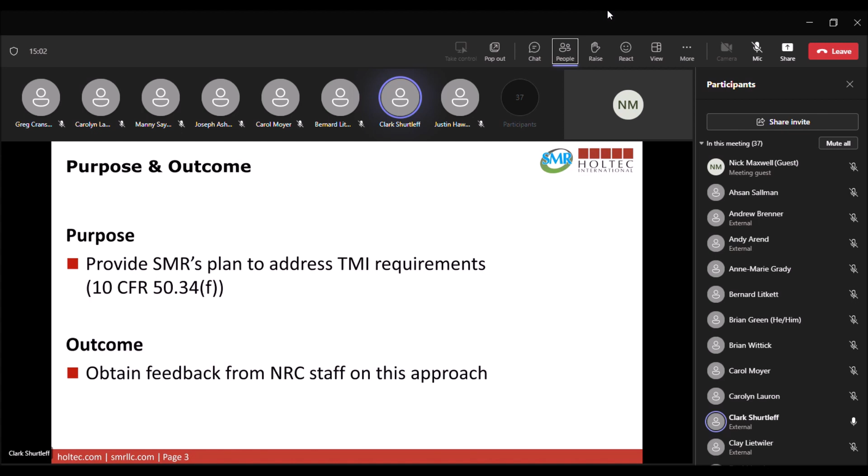The purpose of this meeting is to talk about the TMI requirements contained in 10 CFR 50.34F and to get NRC feedback. The format that most of our slides are in here kind of reflects our planned conformance table in the SAR. We've got the requirement item number on the left, an abridged version of the requirement, then our position on conformance, whether we intend to conform, believe the requirement is not applicable, or are planning to request an exemption, and then the justification on the right.

You'll see on some of the slides we've got either a note, a comment, or a question that we don't intend to include in the final table. The information on the main portion of the slide is what we intend to include in the eventual table. These notes and comments and questions are just for our discussion today.

I won't be going through perfectly in order. Some of the items that we think are just not applicable to us, I've moved down to the end of the presentation. If we end up running out of time and don't get to address all of those, I see them as slightly lower priority because we view them as not really applicable to our design.

For items where we think we're going to conform, or where they're very evidently not applicable, I intend to move through those pretty quickly. If the NRC has a particular comment on any of those that I zip through, feel free to just raise a hand or shout out, and we can go back to that particular requirement.

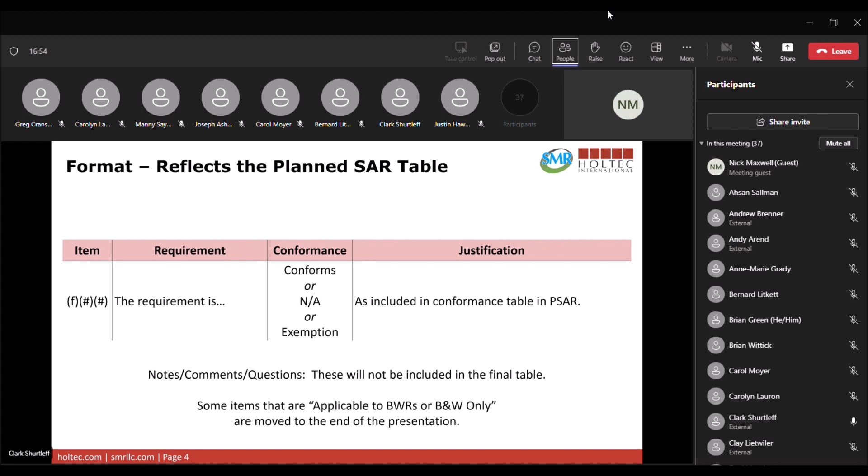All right, any questions on that? Okay, hearing none. A first question before we dive into the actual requirements.

So for the sake of brevity, our intention is to provide a very brief discussion of whether we conform, how we conform, and for not applicable items and exemptions, expect that the detail would be provided elsewhere. For the NRC, does the NRC expect to see a reference to the section where that detail is located in every single case, or are there some cases where a specific reference to any or the several locations where that information might be residing in the PSAR? How much of those references do you expect to see in the final document?

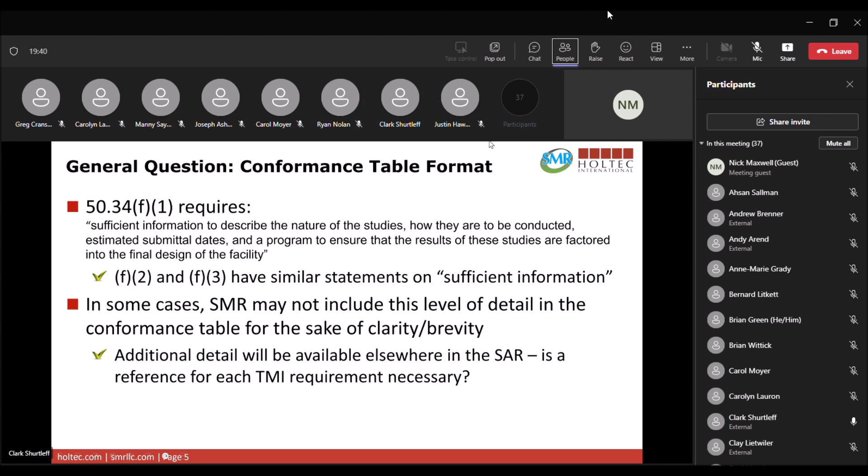All right, so we'll get into the requirements now. The first one is pretty straightforward, supposed to perform a plant site-specific PRA. We are developing that, and we're going to be submitting that as part of the OLA.

The next one, there are a variety of... oh sorry. Yep, it looks like we've got a question. Yes, please. This is Marie Pohida with the PRA staff.

When you look at 5034 F1I, it says perform a PRA to seek improvements in design of the core and containment heat removal that are significant and practical. So it's just more than performing the PRA. It's once the design has been identified, to seek if you can improve that, if there's any cost-beneficial safety enhancements that are significant and practical. So it's just more than submitting and doing the PRA.

Yeah, I think that's a fair comment, and maybe our justification here isn't explicit enough to really talk about that. But when we talk about integrating into the design process, we are specifically intending to mean that we are using some of those findings from the PRA that have led to improvements in our design itself. And so maybe that's just where the misunderstanding is.

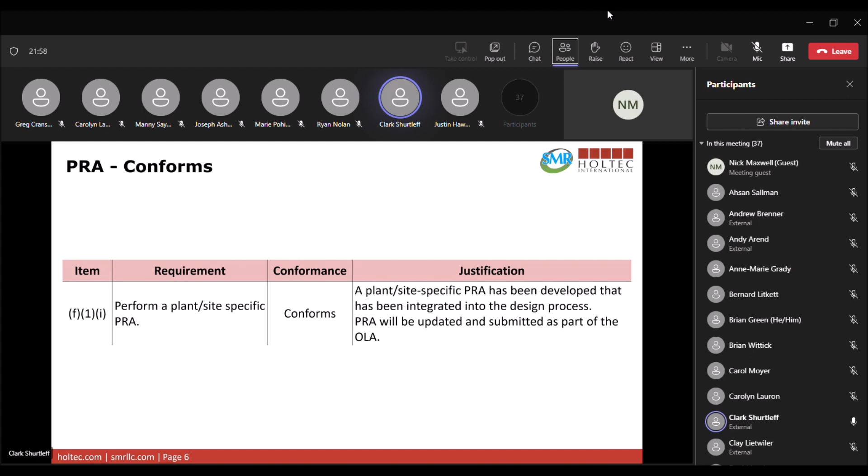Okay, so the next one we're talking about aux feedwater systems. There are a variety of requirements associated with the aux feedwater systems. Our design does not include an aux feedwater system, but we do have a system that serves a similar decay heat removal function. And so our expectation is not to include much of any discussion of the other systems that have similar DHR functions, because the language of this requirement points to the aux feedwater system, which we don't have.

Go ahead, John. No, you go first. Okay, I was just going to ask about this topic. This is John Lehning from the staff here, and there are a couple items where I think this similar question might come up, where there's a different system. Not only the name's different, but a lot of the components are different, but the similar function is served here. And when I look at the requirement, I suspect that a lot of the things have been done, like the reliability analysis, design review.

You probably have done those things, and I'm not the legal authority here to say whether this could be actually called a not applicable one, or if it's legitimate for the NRC to expect that you treat this system that does a similar function according to that requirement. But I think it's something to consider whether it might make sense to include some of that. Especially this one, you've probably already done similar things for that system.

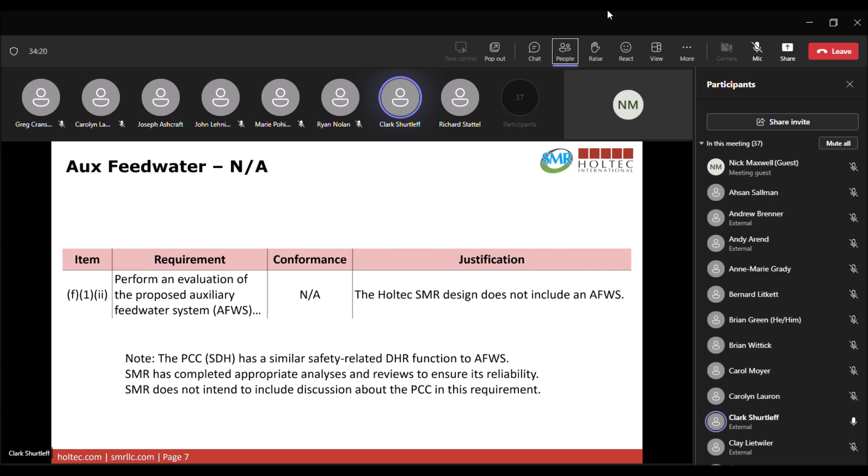Okay, so this next one is about RCP seal damage. We are still working on finalizing our RCP design, and so we are not sure exactly whether we are going to choose a sealless design or one that includes a seal. I guess our question for you is, in the event that a sealless design is selected, would we be considering this not applicable or pursue an exemption?

I'm not sure. This is John Lehning. I'm not sure who on the staff might be the best person to speak to that. And I think, like Ryan said, maybe we don't want to give too definitive feedback. But one way of looking at that is if there's no seal, there's no possibility of damage. And it's almost, to me, as if you could argue that you might be able to have evaluated and found that because you don't have the seal, there's no possibility of damage. I don't know what that final position might look like from the staff. I don't know if you've considered something like that. Okay.

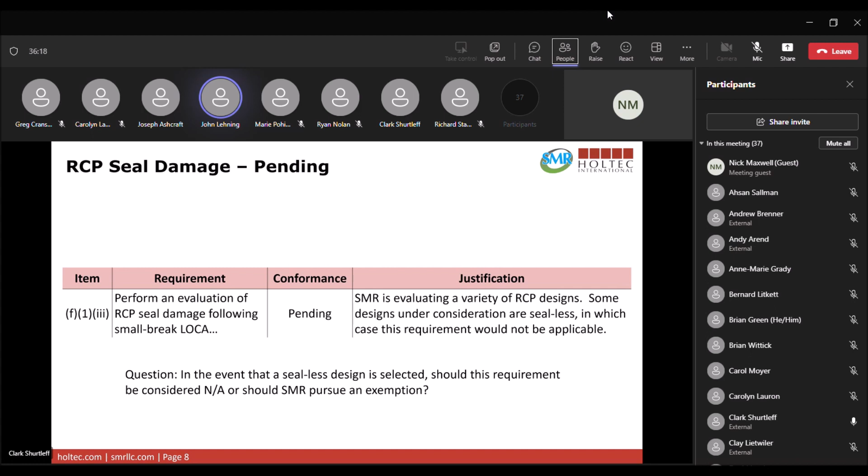Yeah, I guess what you're saying, John, is that perhaps depending on how we would approach that, we could choose conforming because of not having a seal and we've done that evaluation, or we can say potentially not applicable because there is no possibility for seal damage. I guess really all you're saying is there's a couple different ways we can approach this that potentially would be acceptable to the staff. And it sounds like you guys have done some homework, and I know there have been other designs out there without seals or with canned-type motors, so they might have blazed that trail a bit already too. Okay, very good.

All right, so this is about stuck open power-operated relief valves. In this case, we do not include power-operated relief valves in the reactor coolant system. We do have safety valves for overpressure protection, and we do have automatic depressurization valves, which are power operated but are intended to remain open after an initial operation. They're not intended to close afterwards. We weren't intending to provide a great deal of discussion of those valves in this portion, but we will be analyzing unintended actuation of the ADS. So we will be, elsewhere in the PSAR, addressing the possibility of unintended actuation of the depressurization system.

Just a question on that one, John Lehning, again from the staff. Have you looked at the idea of a stuck open safety valve as a part of this too? I think in the original designs here that this requirement was going toward the PORVs might have been limiting to safety valve stuck open. And is that something you've thought through or have looked at precedent on? I guess I'll have to kick that question to Clay. Clay, do you know if that's one that we've evaluated?

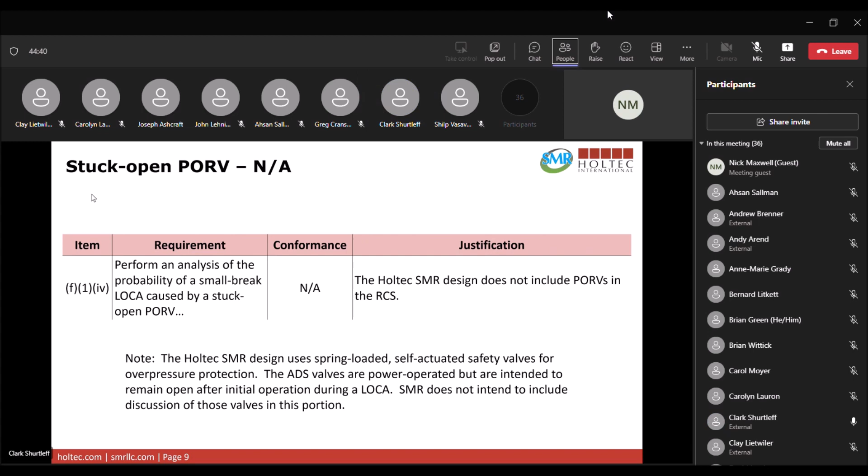All right. This next one is a requirement that was listed as applicable to BWRs only, talking about the automatic depressurization system. Our design includes an ADS system similar to that used by BWRs. We intend to list this as not applicable. Again, we're asking whether it should be listed as conforms, given that we have a similar system, and we either have or intend to perform this risk assessment study.

So it sounds like from the conversation so far that the NRC staff are not going to comment on whether we should list this as not applicable or conforms. Well, this is Ryan. I know you looked at multiple new reactor applications for precedent, and there's been a lot of mentioning of NuScale, but I would go back and look at what AP1000 put here as well, because I don't believe they tried to argue that it wasn't applicable to them. I think they provide some explanation: yes, we have an ADS, and then point to where the information on that system is provided.

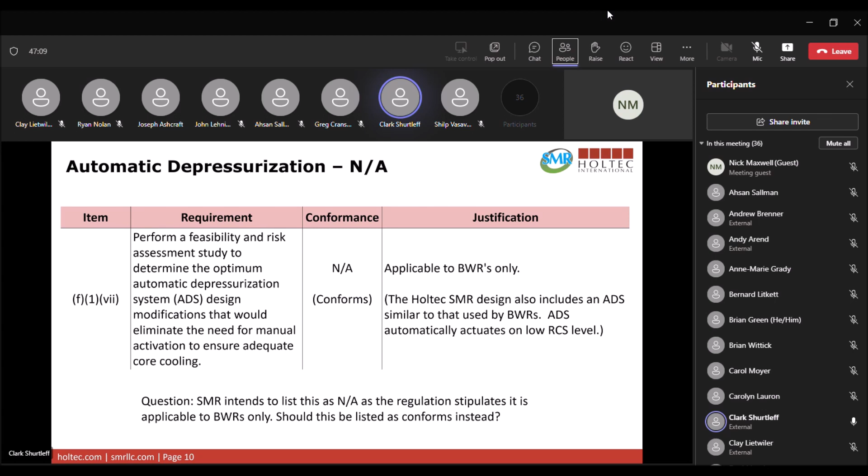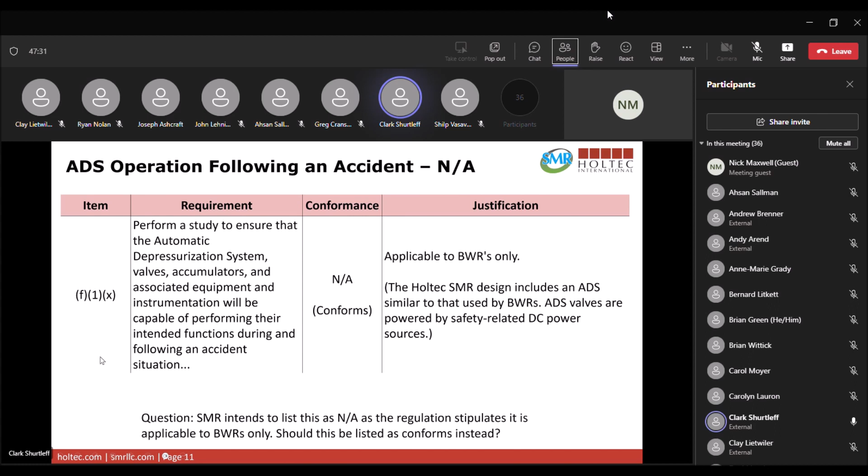For this one in particular, it is not very easy to understand what the intent of the requirement is, and that's why we chose to list two potential outcomes here. I understand the comments you've made so far, and I'm just trying to elaborate a little bit more on our position. And even if we provide all of that additional information, would we be conforming or would it be not applicable? It's not totally clear to us, and perhaps it's immaterial if we provide that information. So, all right, step into the next one.

Simulator capability. This one's pretty straightforward. We're expected to provide capability. We are developing that capability. Any questions there? No questions on that. Something I will say about this requirement, and this is Jesse Seymour from the Human Factors and Operator Licensing Branch: this is a requirement that our Part 50 and 52 lessons learned rulemaking has specifically called out as duplicative of the requirements you'd otherwise find in Part 55, specifically items under 55.46.

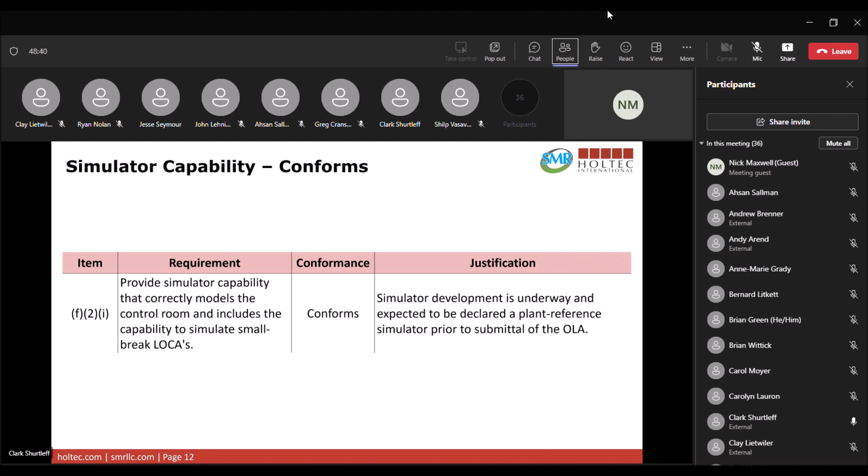So just from an efficiency standpoint, we've self-identified that this is a duplicative requirement. Again, I appreciate noting it here. If you meet the Part 55 requirements for a simulator, you should inherently be covering those. So just know that, longer term, that is something we've sent to the commission as a proposal to correct this duplication. Okay, understood.

The next one is about continuous improvement, establishing a program to ensure that we're continuing to improve our plant procedures. We have a continuous improvement program in place, so we conform with this one.

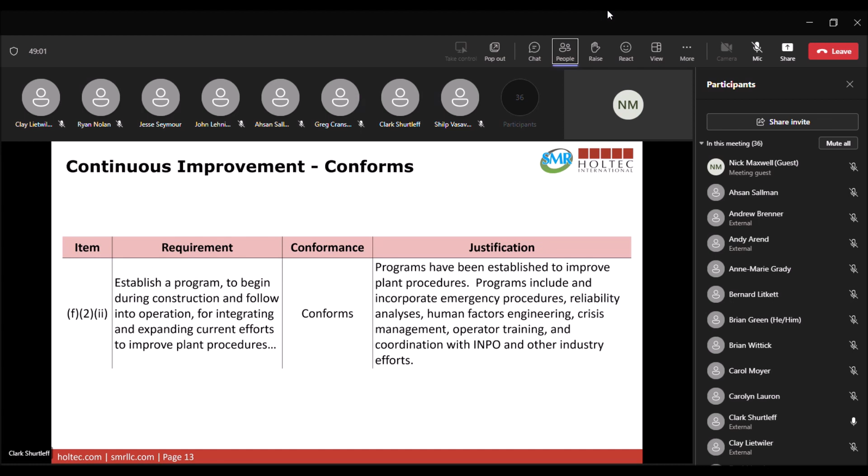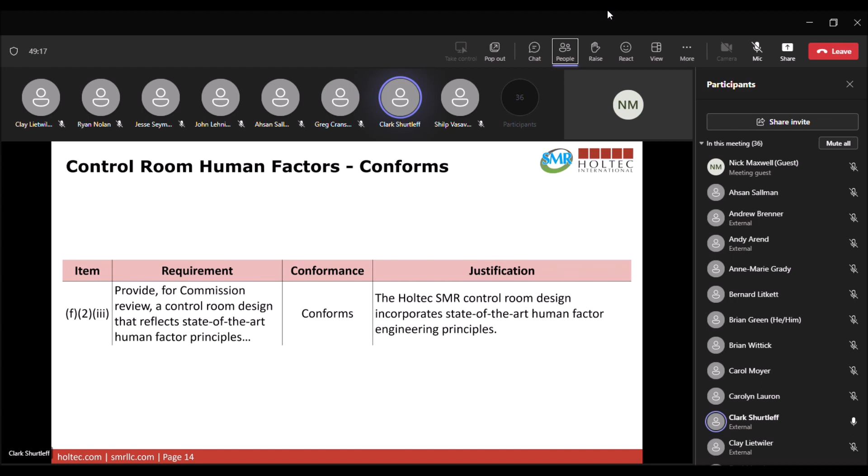All right, this is about control room design and human factor principles. We are incorporating human factor engineering principles into our design, so we conform here. Another item about control room design, it asks for a plant safety parameters display. We include those parameters on our VDUs.

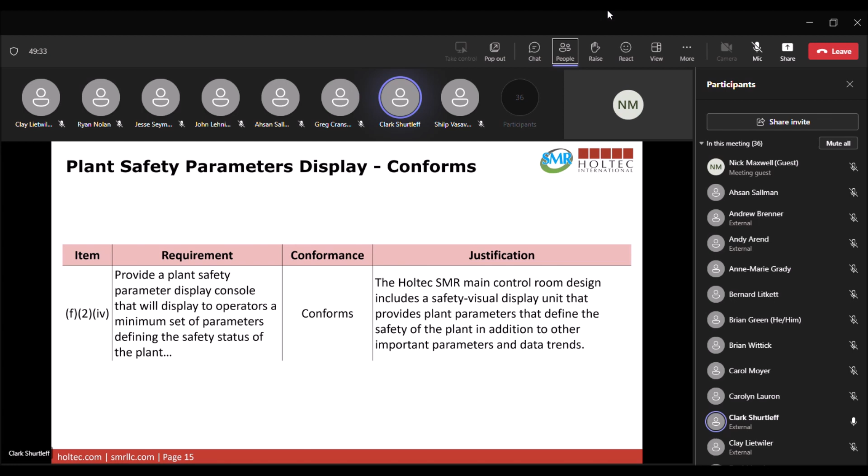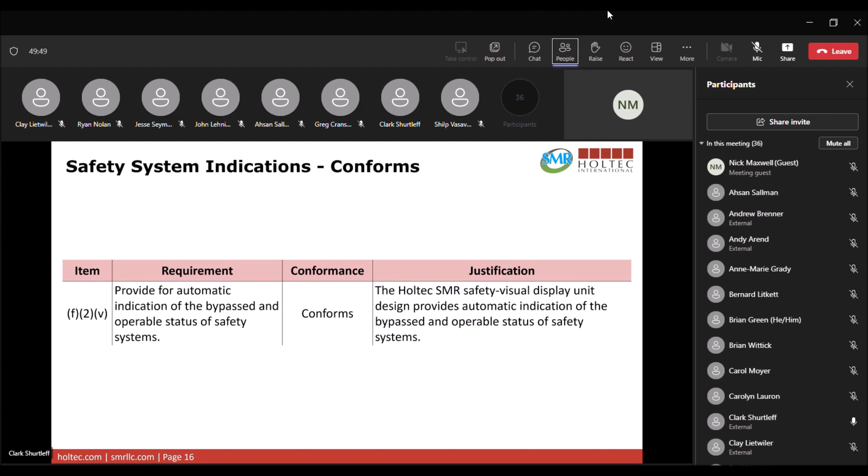This one's talking about safety system indications. On our VDUs, we include the status of safety systems, so we conform here. Okay, this is about high point venting. So the requirement is to provide the capability of high point venting from the RCS.

We do include high point vents that are used during refueling outages, but they are not safety related. The ADS system would be responsible for removing non-condensable gases in the event we had challenges to long-term cooling. Again, we intend to state that our design conforms with the requirement because we do have the capability to remove non-condensable gases from the RCS and to ensure continuous core cooling. But it is not the traditional high point vents that serve that purpose.

One question or comment on that, I guess, with some of the redesign that might be going on with the design, whether the ADS can remove non-condensables from every high point that might be in the system might still be a remaining question, at least from our perspective. And so I guess that would all remain to be seen whether it can serve that function. Obviously, the non-safety ones, or maybe those that are for outage operation, may not necessarily serve that purpose.

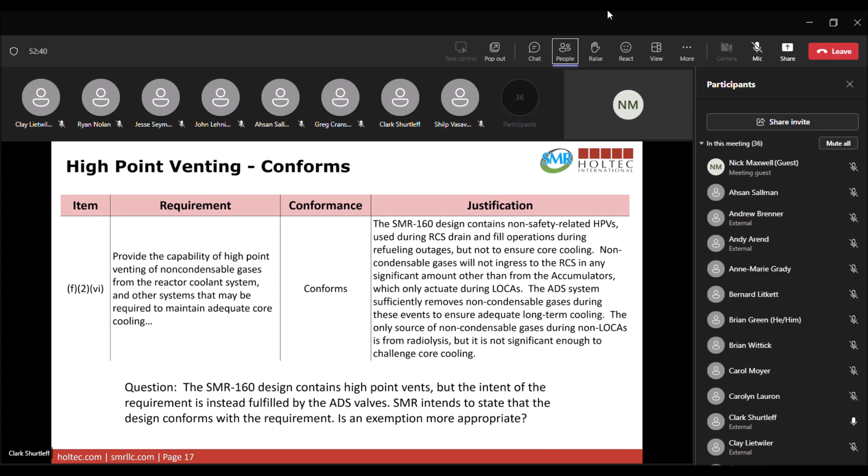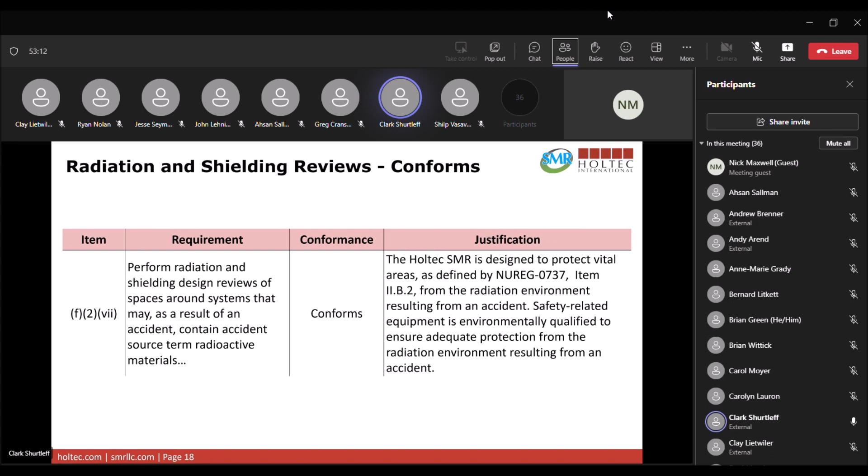The next item is about radiation and shielding reviews. The requirement here is to make sure that radiation from an accident doesn't prevent access to essential spaces or operation of essential equipment during an accident. Our design is set up to protect vital areas and to ensure that safety-related equipment will continue to operate, so we conform there.

The next requirement is about post-accident sampling, the PASS system. We understand there's a bunch of history there, and we intend to pursue an exemption. We recognize that one portion of the requirement is to sample hydrogen in the containment atmosphere, but there are several other requirements in addition to this one that require sampling of hydrogen in the containment atmosphere in an accident scenario. So we're evaluating those separately. Okay.

This next requirement, or a couple of requirements, are about hydrogen control systems. Our design includes passive autocatalytic recombiners to accommodate a 100% fuel-clad metal-water reaction. So we expect to conform here. I guess, again, on performing an evaluation of alternative hydrogen control systems, I'm not sure exactly how much detail is expected. I know I didn't include this in our questions ahead of time. Does staff have any specific thoughts on what level of detail is appropriate for discussing that evaluation of alternatives? Obviously we have evaluated several methods, but I'm wondering how much detail is appropriate there.

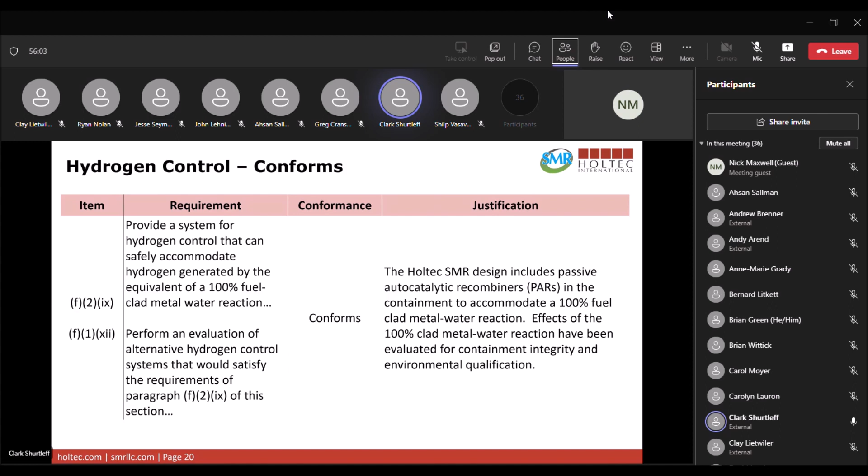The next one's about relief and safety valve testing. There are additional aspects to this requirement that I haven't listed on the slide. We conform to the majority of this requirement, except the aspects related to power operated relief valves and ATWS conditions. We don't utilize power operated relief valves, as we mentioned earlier, and we are pursuing an exemption to other requirements that require evaluation of ATWS conditions. So our intention here was to state conformance.

Sorry about that, sounds like that's the emergency alert going out to everybody. Yes, I just got the same thing myself. All right.

So again, if a member of the staff thinks that it would be more appropriate to include an exemption request here, because of the related exemption that we're pursuing, please speak up.

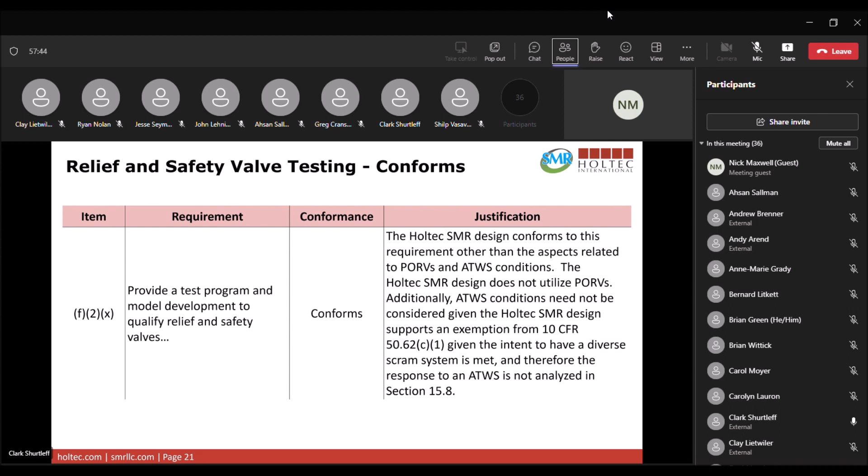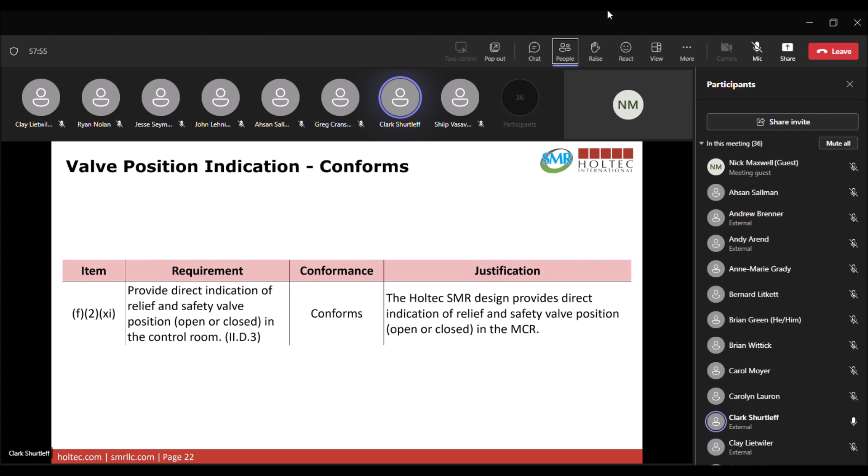Okay, hearing none. The next requirement is about safety valve position indication in the control room. We provide direct indication of these valves, so we conform there.

The next one, again, is aux feed water. I think we've discussed this one a sufficient number of times now, so we can move on from this.

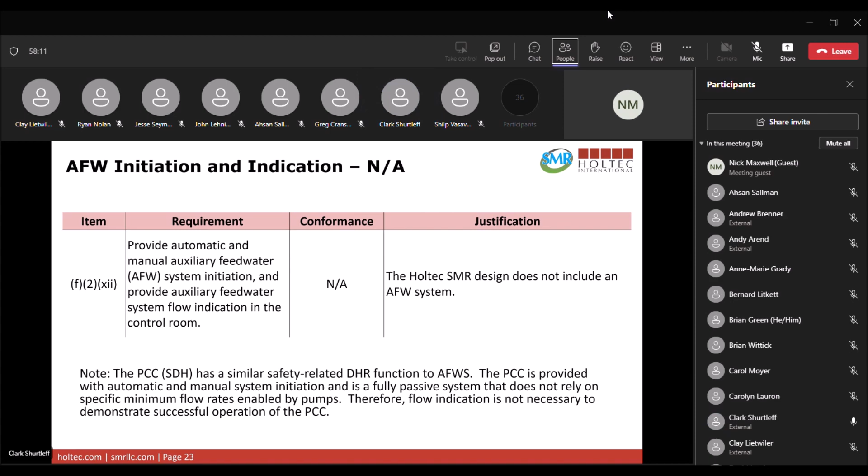So did you want to actually pursue that one, discuss that one in a little more detail? Okay.

Okay, this next item is about pressurizer heaters and natural circulation. The requirements are on the left there. So this one is still somewhat in flux as we're continuing to evaluate the results of our design, the recent design updates. We don't rely on pressurizer heaters to maintain natural circulation. In the event of a loss of offsite power, we have a couple of methods to accomplish decay heat removal.

So this is another one where we could view this as conformance or exemption. We don't use the pressurizer heaters to maintain natural circulation, but in the event of a loss of offsite power, we have alternative systems that would be capable of ensuring we maintain natural circulation and decay removal.

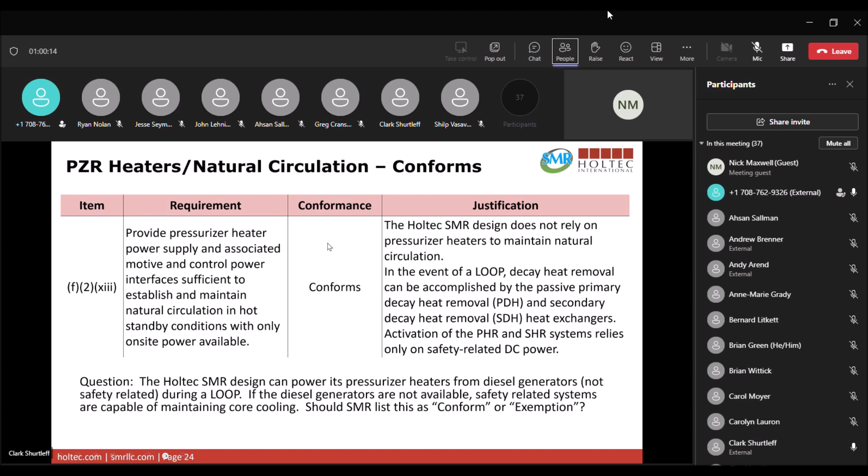So our next one is a series of requirements about containment isolation systems. I haven't listed them all here, but our design will meet all of those requirements, so we're conforming here.

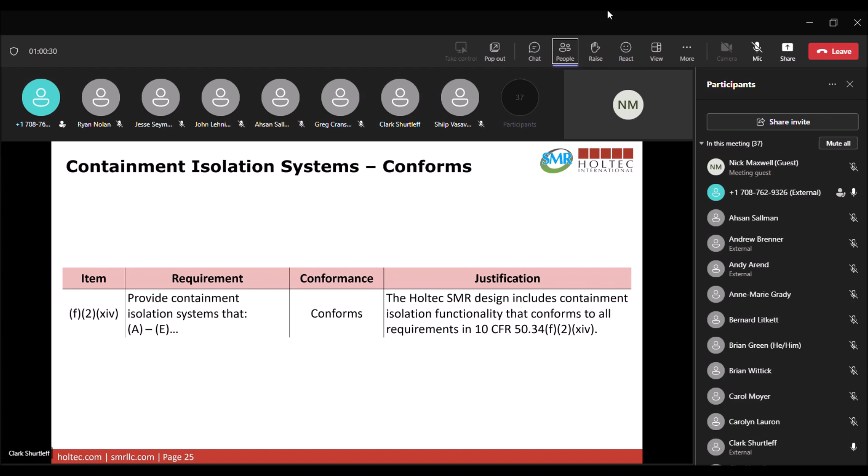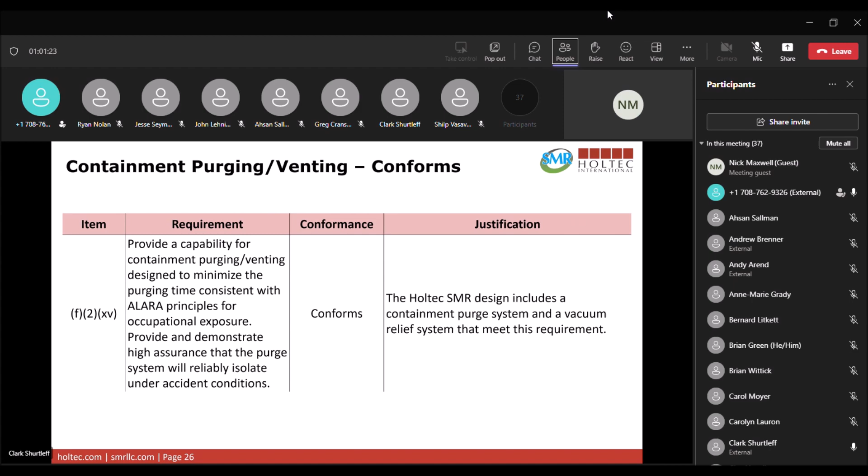Sorry, was there a comment there? Can you say what the justification for that particular exemption is, if you go that route? I don't know that I want to start expounding on that at this point. If we do pursue it, we would develop that justification and provide it at that time. Okay, fair enough. Thank you.

All right, this is Shilp. I had a question, not explicitly about what you're doing here or what you plan to do here, but more about next steps for cases where you are performing evaluations and I'm not completely sure. Is this going to be it and then we see stuff in the PSAR, or would there be pre-application engagements once you have finalized where you land on different items where you're still doing evaluations and maybe you determine you need an exemption or not?

Yeah, Shilp, I can take that one. So I think anytime that we see us potentially going into exemption space or deviation from guidance space, we definitely intend to engage the staff to make sure that, one, the level of detail and the justification that we're providing, and two, if there are any concerns or questions from the staff, we try to get ahead of that before the application is submitted itself. Our goal is not to surprise the staff in any part of our application.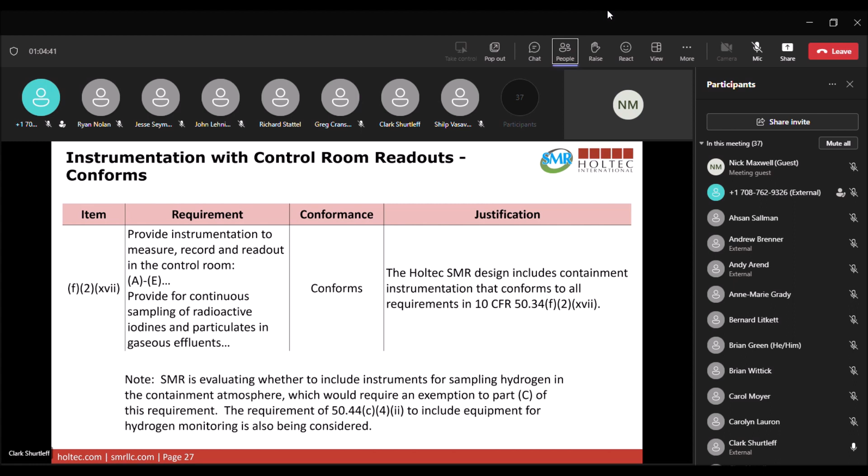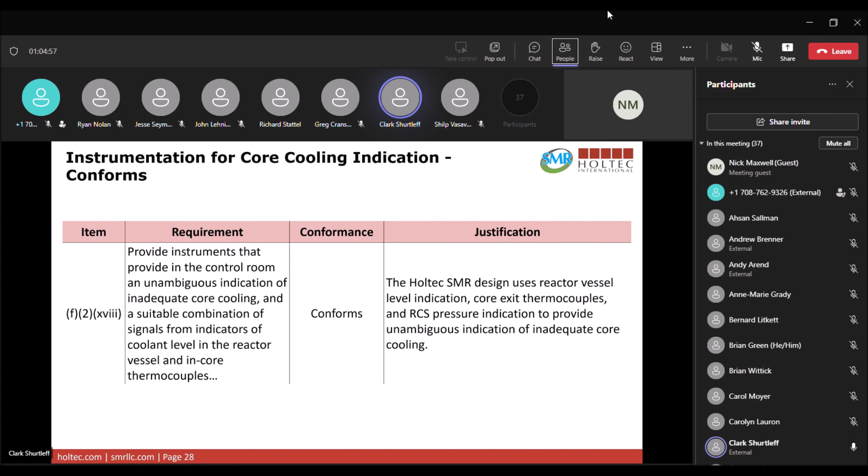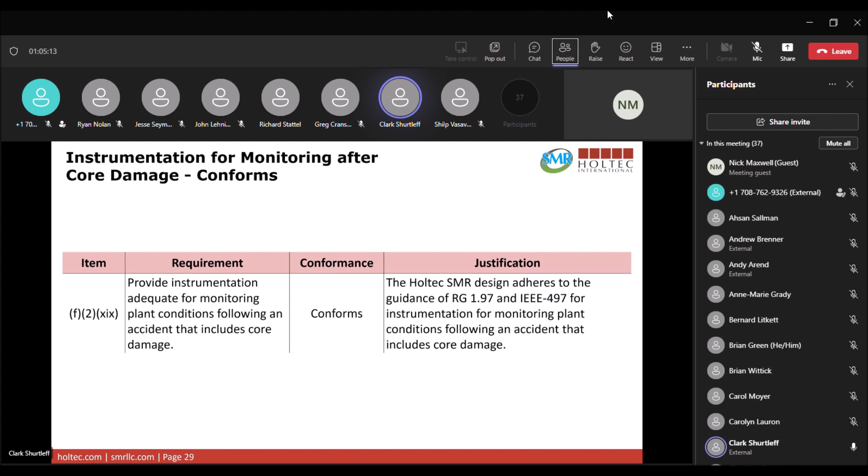The next one is instrumentation for indication of core cooling. There's a requirement to ensure unambiguous indication of inadequate core cooling. We have a variety of ways to provide that indication, so we conform there. The next requirement is about providing instrumentation adequate for monitoring plant conditions following an accident that includes core damage. We adhere to the relevant guidance, and we conform on this one.

The next requirement states that we need to have several support buildings. Our design includes those buildings, so we conform.

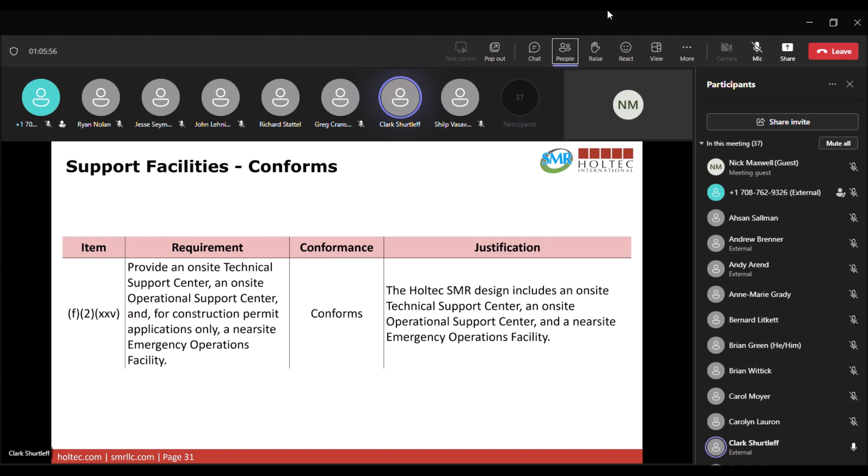There's a requirement to include leakage control and detection for systems that would contain source term radioactive materials outside of containment following an accident. Our design is such that we do not circulate or have systems in which materials containing source term radioactive materials exit the containment. So this requirement is not applicable to us.

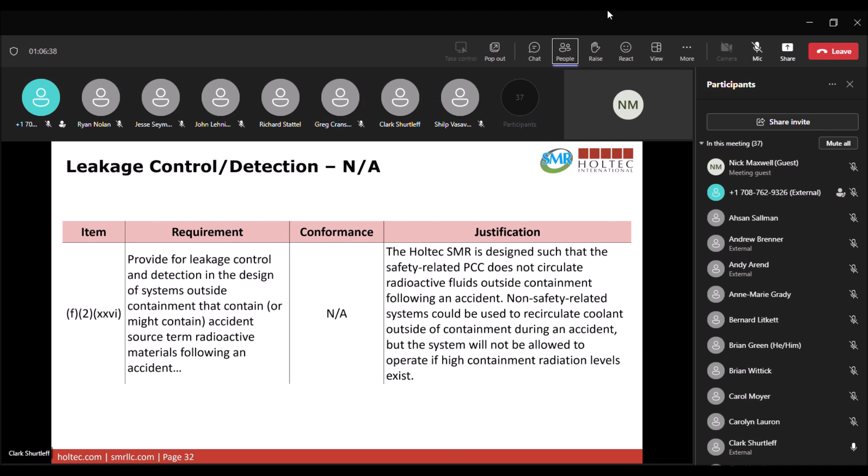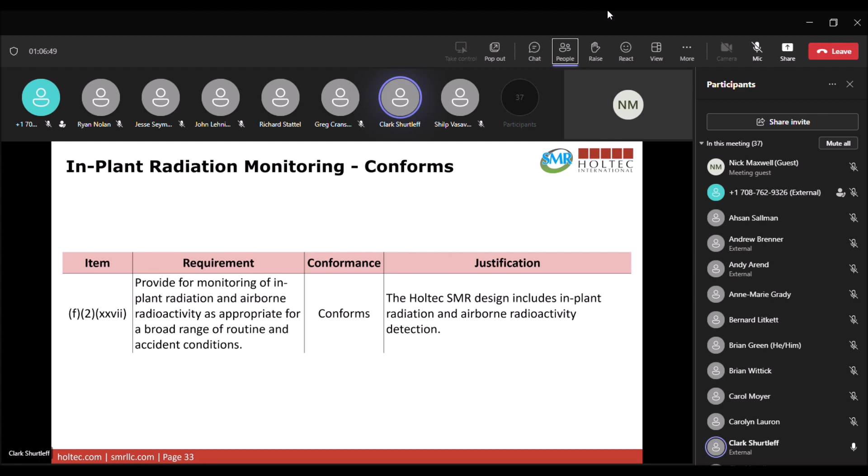This next one is about in-plant radiation monitoring. We include the required radiation monitoring, so we conform.

This next one's about control room habitability, ensuring that we have habitability in the event of accidents where radioactivity and radiation may be causing problems there. We've evaluated the potential impacts of that, and our control room is designed to preclude habitability issues.

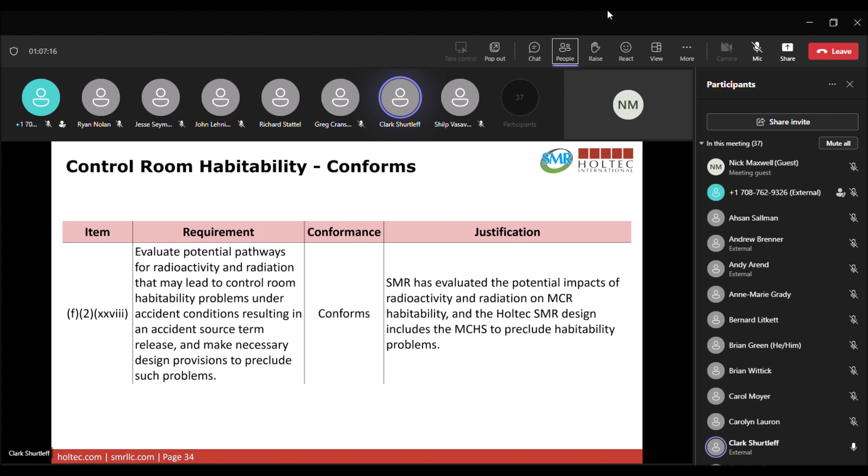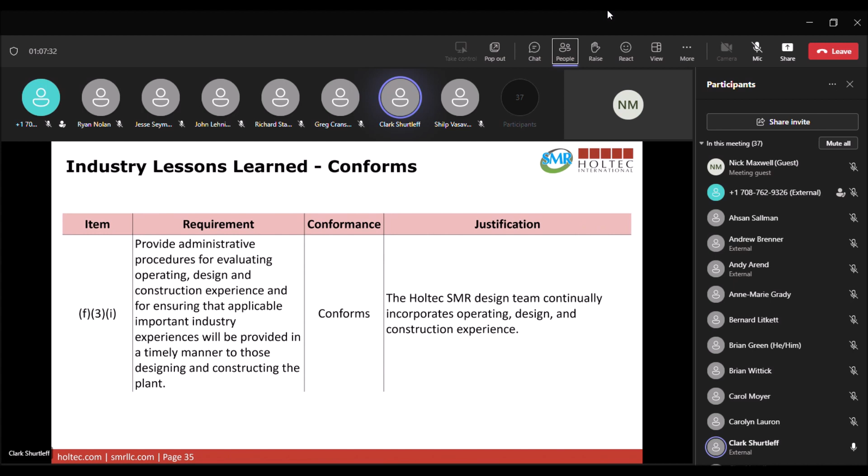Next is about quality assurance. In our quality assurance documents, we will demonstrate that we conform to these.

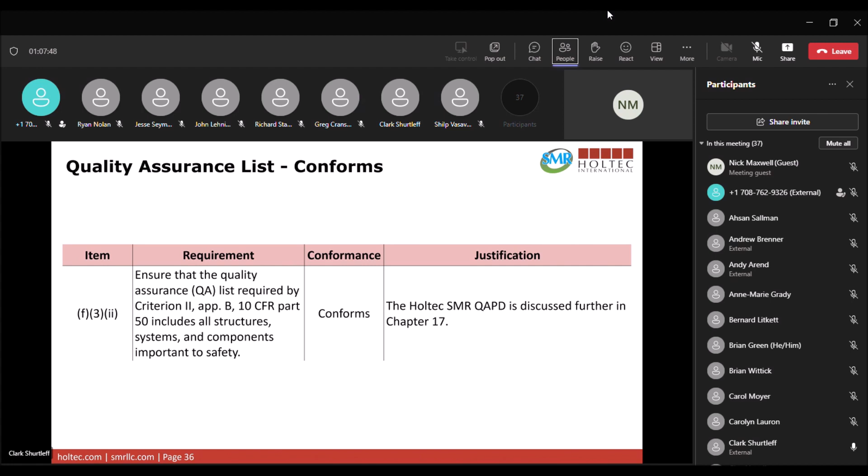This one is quite similar, right? More quality assurance requirements. Our quality assurance document is going to demonstrate that we conform to those.

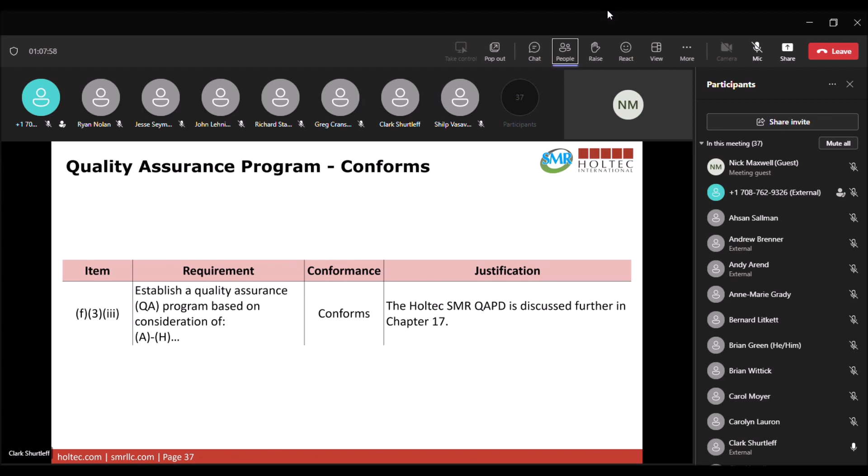This one is about containment penetrations. The requirement is to provide one or more containment penetrations in order not to preclude future installation of systems to prevent containment failure. We intend to pursue an exemption here. Our containment is designed to accommodate peak containment pressure for design basis events, but we were hoping to get a little clarity on the intent of this requirement. Our general understanding is that it was intended to be applied to existing plants as a means to future-proof them, so it's not totally clear to us how this ought to be applied to a new design, where we are seeking to anticipate and provide appropriate penetrations for everything that we could need in the future.

There's a hand raised, Anne-Marie Grady. As far as providing one or more containment penetrations, I think you'll find if you look at AP1000 that they complied with it without an exemption, by having penetrations equivalent in size to a single 3-foot diameter, for your information. So, all I know about the intent is exactly what's in the language, and that's to preclude future installations. The idea would be to use existing penetrations that have other purposes as well, but designate them as being able to be utilized if future installation was required.

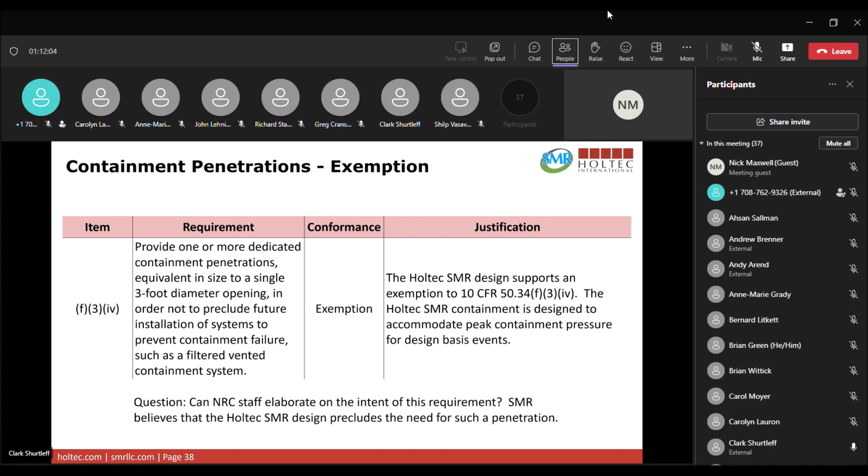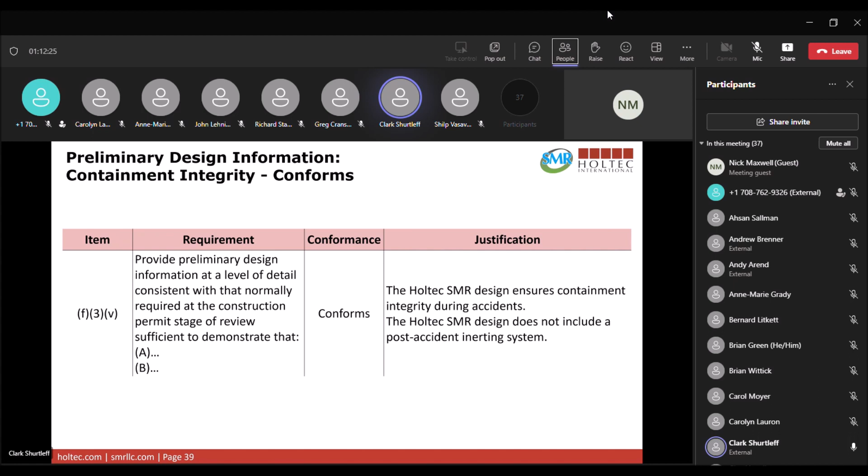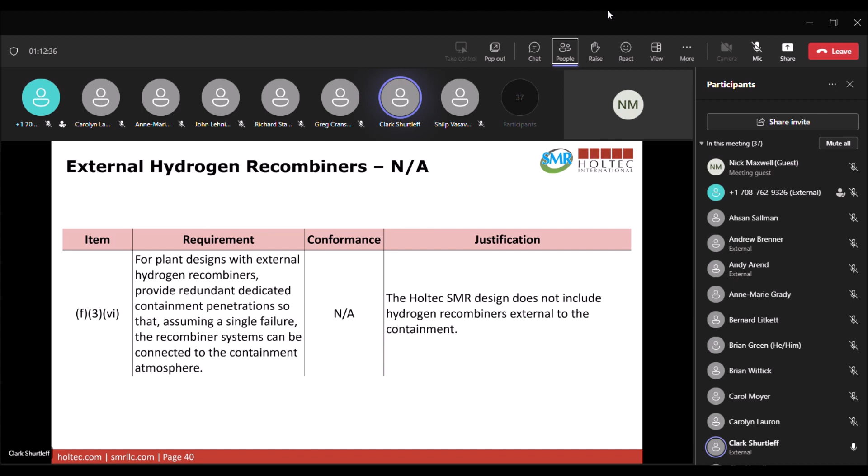The next item is about containment integrity, with a variety of requirements here. Our design ensures containment integrity during accidents, and one of the other portions is about a post-accident inerting system, but we do not include one of those. The next one is about external hydrogen recombiners — our design doesn't include hydrogen recombiners outside of containment, so it's not applicable here.

The next one is to provide a description of the management plan. We intend to provide a pointer to where that will be in the PSAR, so we'll conform here. And that's the extent of the ones that are kind of not either BWR or B&W specific.

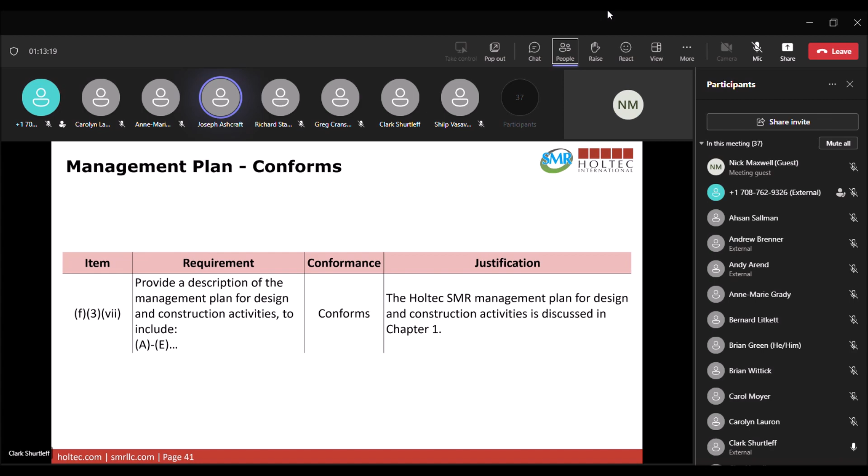Is Pat available? Is he on to answer that? And maybe the discussion's not needed now, I just saw that and it struck an interest in me. Probably electrical should have more interest than I do, but do you want to speak to that, or should we follow up once we talk to our electrical folks? Yeah, I mean, I can at least give a high-level overview of how the system would work.

Essentially, we have batteries considered Class 1E batteries that would provide power in the event of safety system actuation or a loss of all other power sources. There's enough power in those batteries to have one-time valve actuations to get our plant aligned appropriately to go through a specific design basis event and maintain those states for supporting long-term cooling. I want to say I think that's similar to how the AP1000 is designed, though I'm not positive on that front.

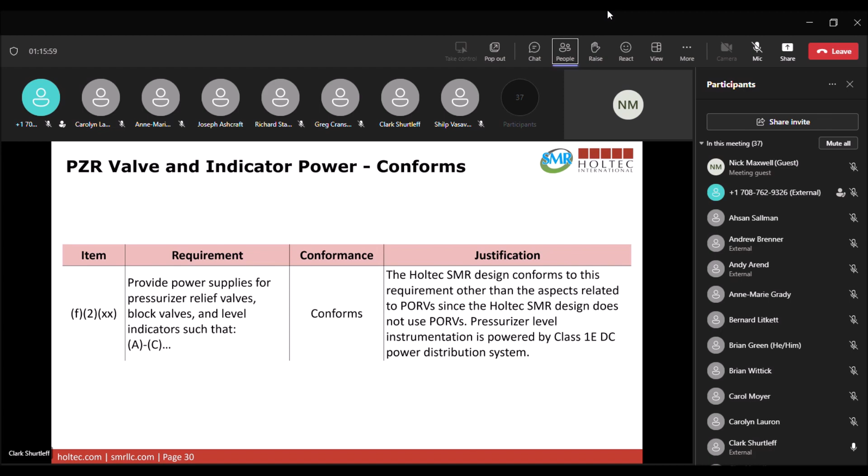All right, so we'll walk through these. There are a couple where we have particular questions. I'll aim not to rehash too much of what we've discussed already.

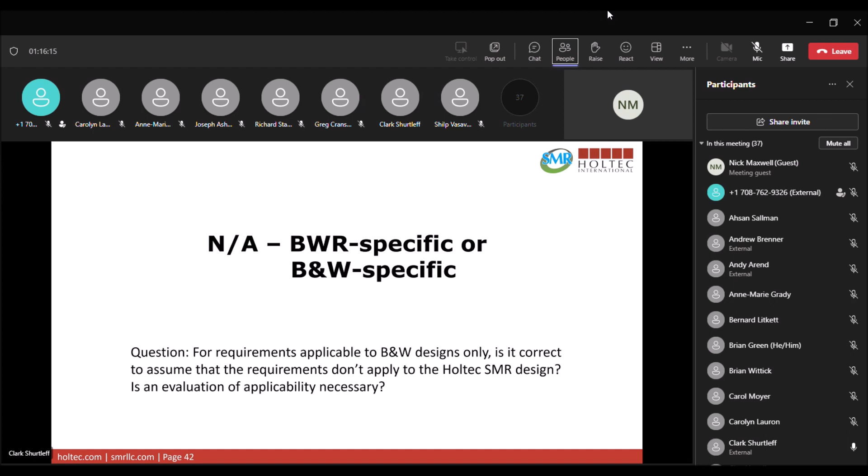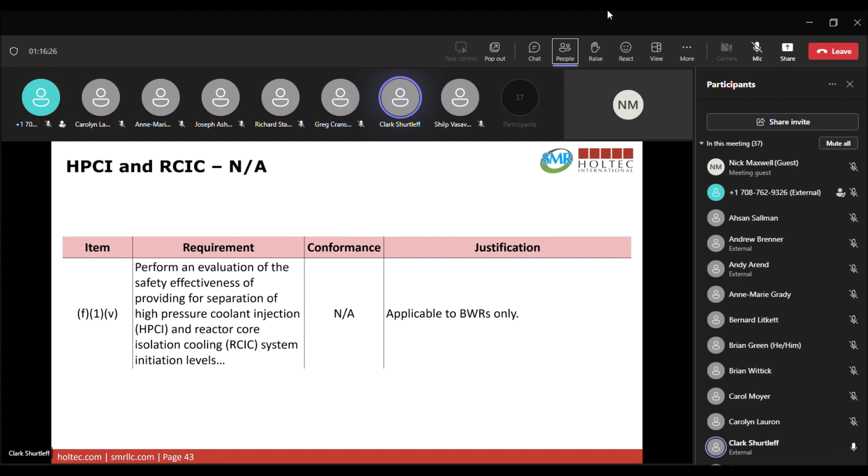This first one's about high pressure coolant injection and reactor core isolation cooling systems, applicable to BWRs only — not applicable to us. This one's about relief valve modifications, stated as applicable to BWRs only, so we're viewing this as not applicable. This one is about core spray and low pressure coolant injection, again listed as applicable to BWRs only. Long-term operation of some of the safety systems we discussed earlier are BWR specific.

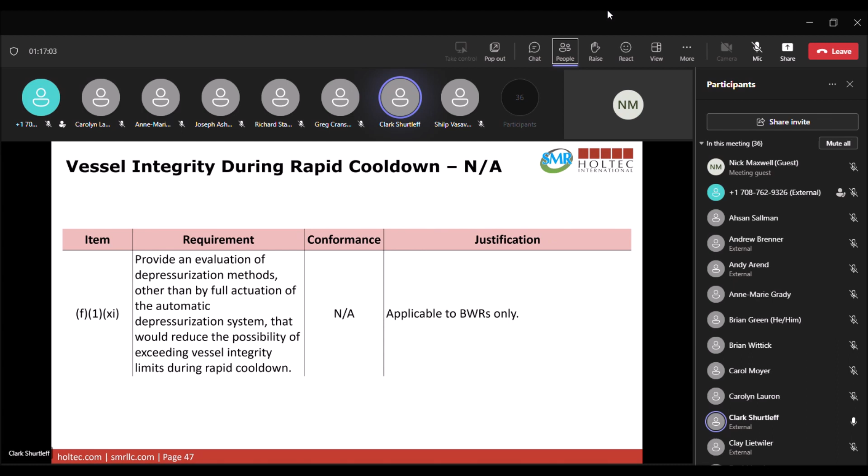Evaluating vessel integrity during rapid cool down. It's applicable to BWRs only. Actuation of, so this one was interesting. It's applicable to B&W designs only. It's discussing establishing a design criterion for the allowable number of actuation cycles of the ECCS in the reactor protection system. We view this as not applicable.

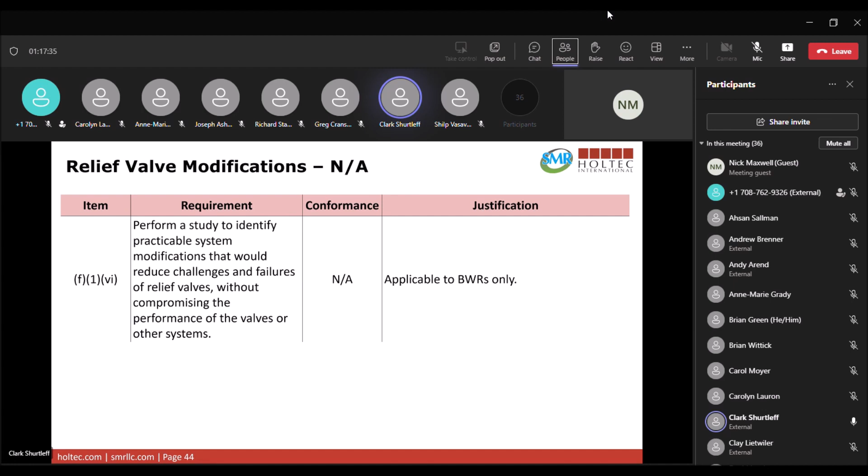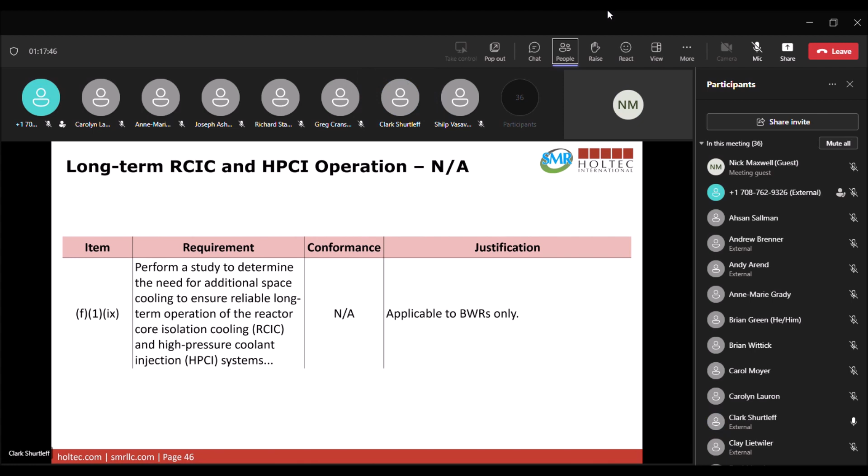I guess for several of these, such as evaluating relief valve modifications, low pressure coolant injection, which could be viewed as somewhat similar to our accumulators, vessel integrity during rapid cool downs, ECCS actuation. All of these are ones that you could squint at and see us potentially having the intent of that requirement be applicable to us.

And so this kind of comes back to that same question of, for these ones where it states explicitly that it's applicable just to BWRs or B&W designs, should we be providing a discussion of, or is the staff expecting a discussion of the various ways that we looked at our relief valves to try and improve them, and to look at the allowable cycles on our safety systems?

I guess, oh, go ahead. I was just going to add, I know we've talked a lot about intent already today, that these ones are the ones in particular that I think we've really struggled to understand the intent here. We've gone through some of the NUREGs and other documentation to try and eke out what the intent is behind some of these, should we really be considering them potentially applicable? But we haven't really seemed to find that documented anywhere.

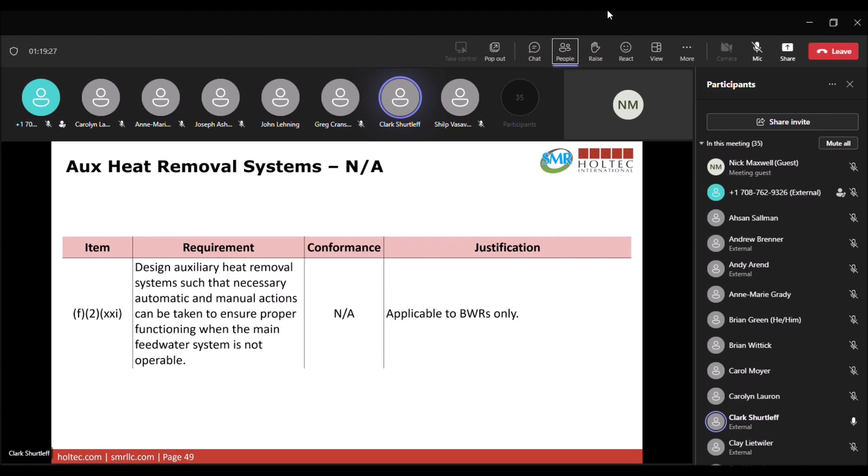And we're still trying to go back and compare to what other applicants have done recently. And it does seem like there's not a whole lot of specific discussion as to why these requirements are not applicable, other than just saying they are applicable to B&W designs only.

And again, I don't know if there's other staff that are better able to answer this, and this might be one where staff wants to look at this a little bit more and come to a more consensus answer. But I'll just tell you off the cuff, the idea that this is singled out for one design, even though staff could potentially have asked that question of other designs but didn't, does suggest that there might have been more of a focus on this one design for a reason. That's just some tentative feedback, but I think we would probably have to look at that a little more closely before we took a position.

Okay. Yeah, I recall looking at this particular one. I tried to go into several of the NUREGs and wasn't really able to nail down exactly where this one came from. So perhaps that's something that we can wait for a meeting summary to see kind of a more consensus opinion. Is that appropriate?

I think we could look at seeing what we could come up with by the time we have that meeting summary ready, at least. And if we can say more by that time, then we would definitely try to include that. Yeah, this is Greg Cranston. As John said, depending on what's going on, we can decide if we need to schedule a future meeting when we know we have the feedback that you're looking for. Okay.

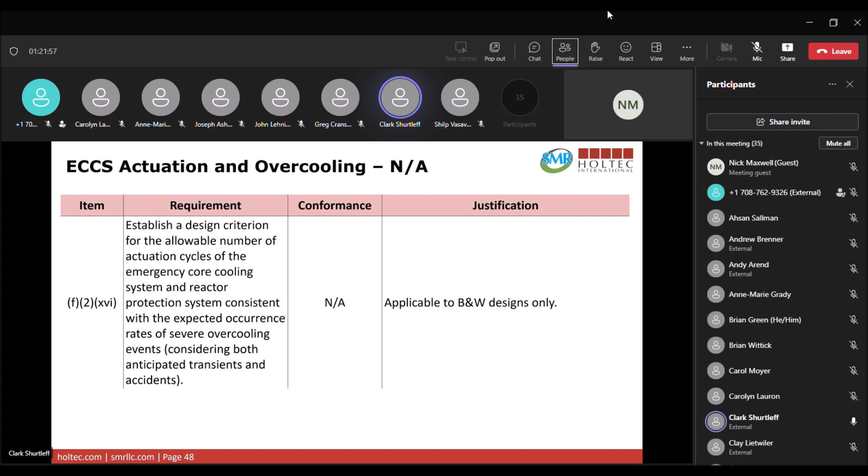So I think that takes us pretty much through to the end. The last few here are in the same vein, either applicable just to BWRs or B&W. Again, we think that in many cases, if necessary, we could provide a little bit more explanation of why it might not be applicable to us, but we will wait for the meeting summary to get a better idea of what y'all think on that. Does anyone have any questions on these last few or any general comments to make?

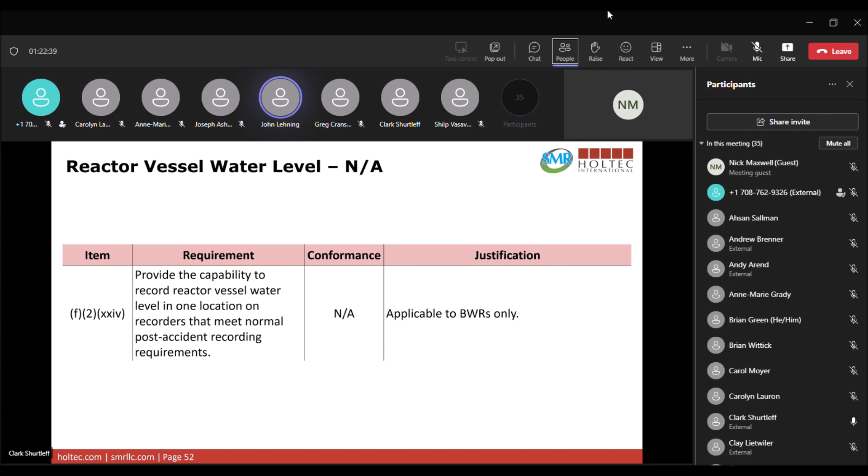This is John Lehning. I just wanted to comment on the item that was on page 51. The comment was whether I might want to look into that one a little bit more too, to make sure I understand whether some of the other plant designs may have already voluntarily incorporated some of that into their logic, and that might have been the reason why this was singled out to this design. I don't know if you guys are aware of that one or not, unlike the other one we just talked about, but I know that this type of a trip is sometimes incorporated into other plants' designs as well.

Yeah, okay, and we're evaluating this part for our reactor protection system. Okay, yeah, fair enough. I don't recall this one specifically, but I imagine that I would have looked at it when I was looking at a variety of these other requirements, and I don't recall seeing anything really specific about why this was specific to B&W plants. But

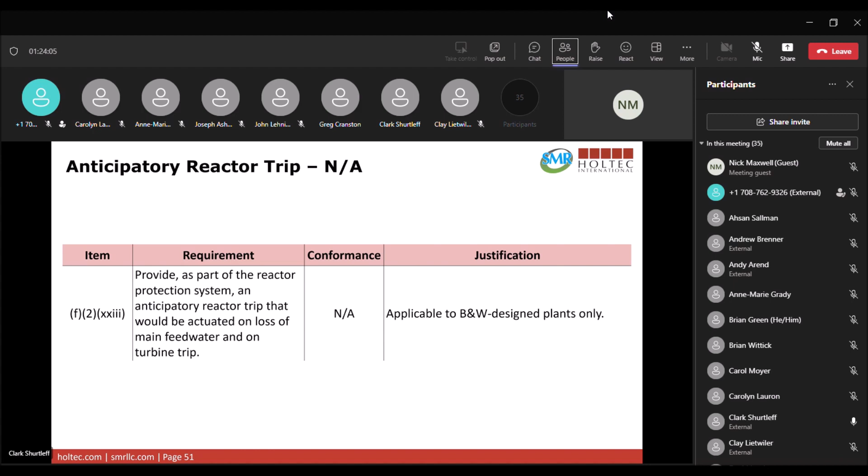Okay, any other last questions or comments? I'm not sure if I missed it, but can you go to page 19? Sure. Didn't think I missed this, but so this one talks about sampling the reactor coolant system. Do I understand this correctly, that there's no capability to sample the reactor coolant system?

There is capability to sample the coolant system. I believe that the difference here would be that it would not necessarily be available in the event of a severe accident. So I can provide maybe a little bit more context. I think what we're saying here is we do have the capability to sample during normal operations, and the nuance here might be that we think there are other effective means of assessing core damage in our plant design other than just taking reactor coolant samples that might be